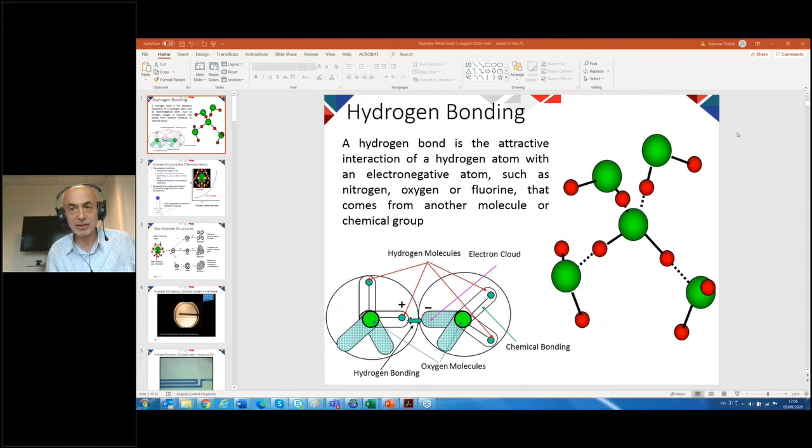Starting with hydrogen bonding. Let's see if I can have it full screen. Hydrogen bonding - water is basically a very strange compound because it can form hydrogen bonding.

Hydrogen bonding is basically when hydrogen loses an electron to oxygen. So it becomes partially positive, and the electron cloud of oxygen is partially negative. So in addition to van der Waals forces, you have hydrogen bonding. That gives water a very stable condition. That's why water can freeze and can melt or become liquid at relatively high temperature.

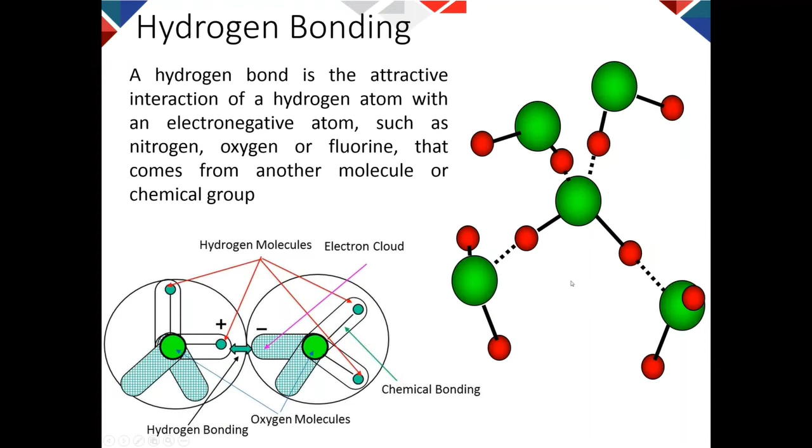So when water is in the liquid state, you have this hydrogen bonding and they form a shape like this. And if we have a gas molecule - this green sphere is the gas molecule, this red is oxygen, the white are hydrogen - when we have a gas molecule, the gas molecule gets trapped in the cages that the water molecule will form. So the gas molecule becomes trapped in the cages that water molecules form.

For the formation of hydrate, we need hydrogen bonding, so either we need water or ice. And then we need a suitable size molecule - if the sizes of the molecule are too big, they cannot fit in this cavity, and therefore they cannot form hydrate. And we need suitable temperature and pressure conditions.

Suitable temperature and pressure condition is this curve. To the right, we don't have hydrate. To the left, we have hydrate. Now the position of this curve depends on the composition of the hydrocarbon phase and composition of the water phase.

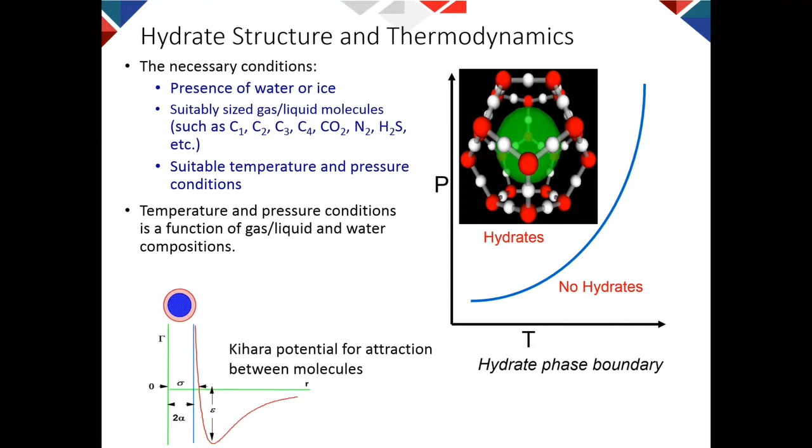There are three main structures of hydrate. The initial or common structure is a cage, and a small cage - all of these different structures have a small cage. So 2 of these small cages and 6 of the large cages will be structure 1. And then 16 of the small cages and 8 large cages form structure 2. And these cages are slightly different.

This one has 14 faces, and this one has 16 faces. And then structure H normally does not form in natural environments. So normally in the oil industry, 99 or 95% of hydrates are structure 2, and very rarely, when we have very lean gases, we can form structure 1.

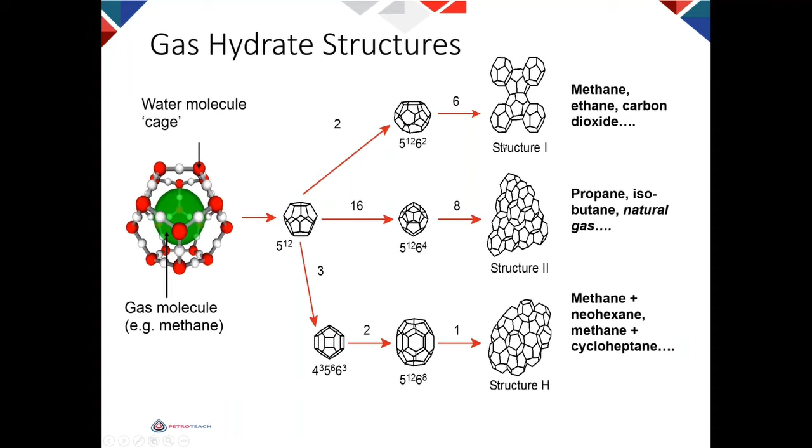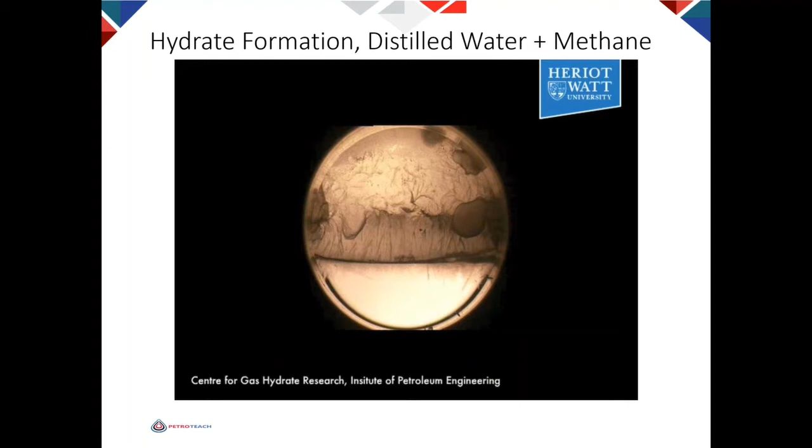Now, there's a video showing hydrate formation. This is a high pressure cell, and you can see that at the interface, most of the hydrate forms. The reason they form at the interface is because the amount of gas in the hydrate structure is a lot more than the amount of gas in the aqueous phase. Therefore, hydrate normally starts at the interface.

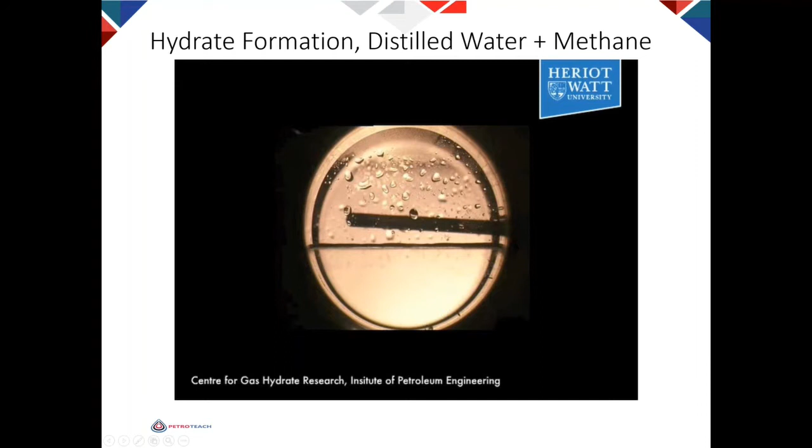But for the formation of hydrate, we don't need gas. Hydrate can form from gas dissolved in water. Here you don't see any gas molecule, but we can still form hydrate.

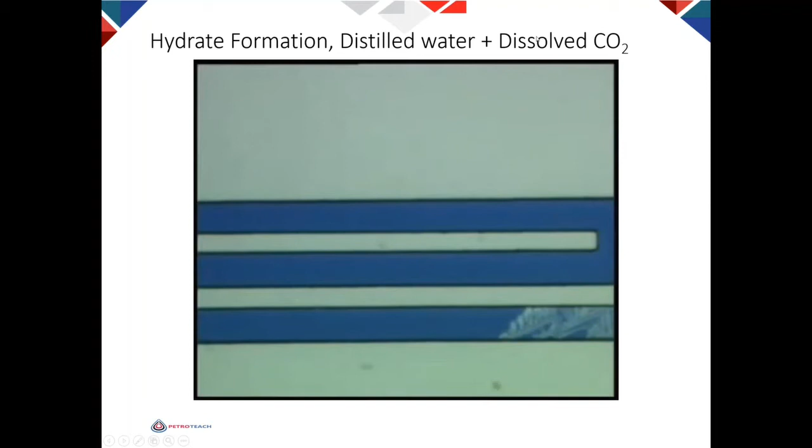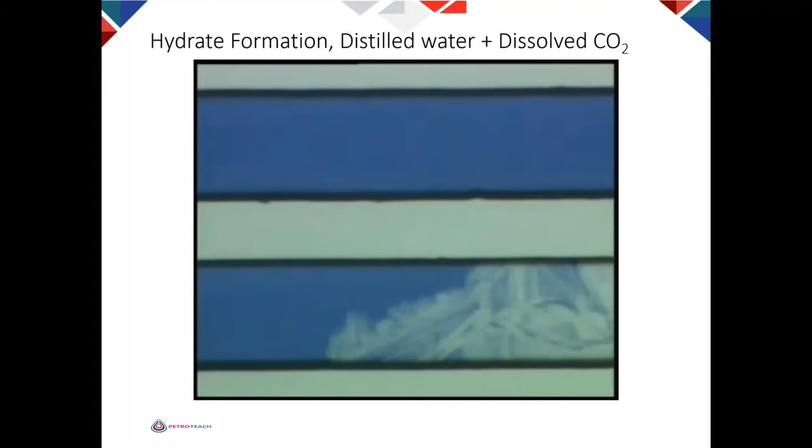And you see that CO2 has also formed hydrate with methane, but CO2 here you can see is forming a significant amount of hydrate in the aqueous phase without any gas phase. And we can control the rate of hydrate formation by playing with the pressure.

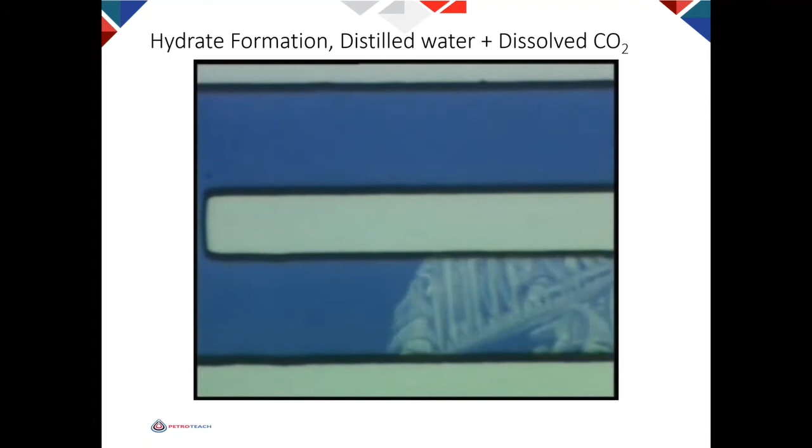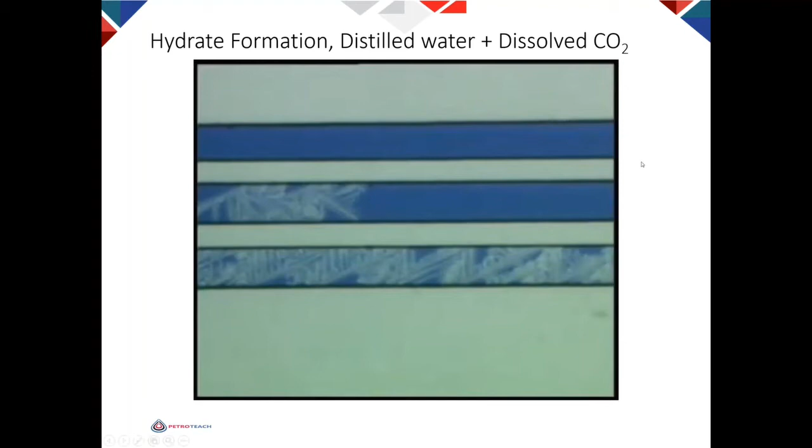And you can see that they are like a tree because they want to lose the heat. So remember, they form sort of fins to lose the heat because hydrate formation is exothermic. It produces a lot of heat, so you need to lose the heat.

Now, as I mentioned to you earlier, different pure compounds have different tendencies towards hydrate formation. In the gases we have in the industry, H2S, you see that it is a very strong hydrate former. After that, IC4. After that, propane. After that, C2. After that, CO2. And after that, methane, and then nitrogen. This is the bubble point, basically the vapor pressure line, where above the vapor pressure line we have liquid, below that we have gas. So that gives you a feeling of the tendency of different compounds to form hydrate.

So if the hydrocarbon is a mixture of these compounds, depending on the composition and concentration, you can have the hydrate phase boundary of the system somewhere in between. So for example, if it is here, then CO2 is an inhibitor, nitrogen is an inhibitor, but methane is a promoter. If it is here, then H2S is a promoter and methane is an inhibitor because they make hydrate formation difficult. So the phase boundary of the system depends on the composition of the gas.

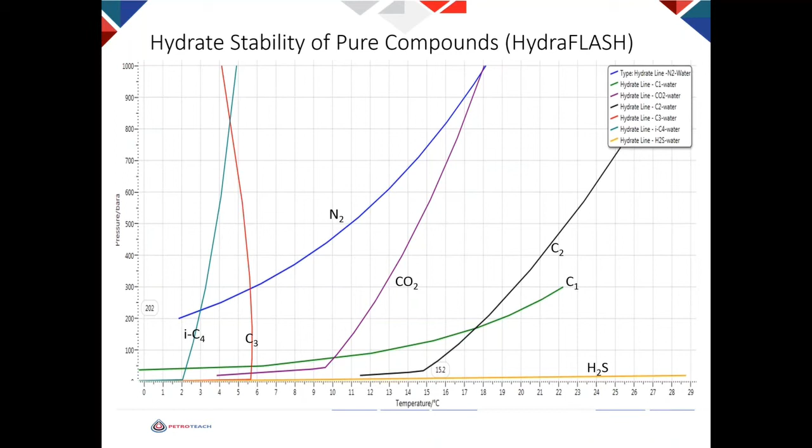And as I mentioned earlier, we have two major hydrate structures in the oil industry. Now, I just used our software and predicted the hydrate phase boundary of this mixture. I call it natural gas for future users of this mixture. So here I'm plotting the hydrate phase boundary for structure 2 and structure 1 using this gas mixture. If the operating condition is here, then only structure 2 forms. If it is here, then there is potential for both structure 1 and structure 2 forming. So that's something that can be important when we are trying to prevent hydrate formation.

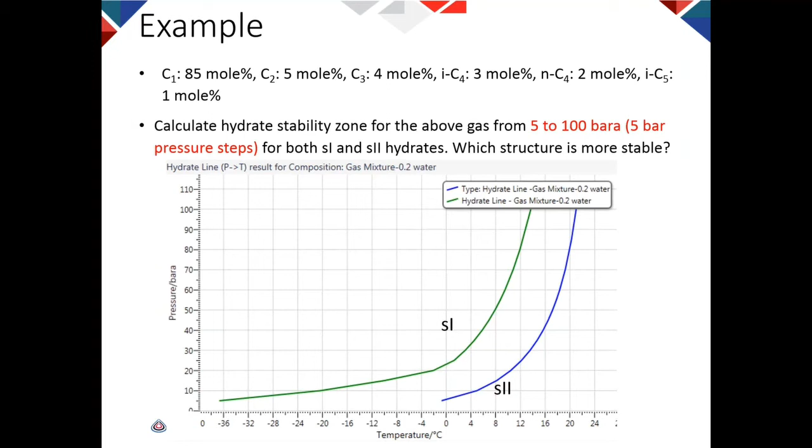So, it's better to be able to predict the position of the different structures when we are trying to prevent hydrate formation. There is another mixture. This is a very lean gas, Nuggets field in the North Sea. You see that 98% is methane with a small amount of different compounds. You see that here, structure 2 is to the left of structure 1. So the hydrate phase boundary is determined by structure 1. So here is that 5% I told you, where the system is structure 1, and 95% of the systems we see around the world are structure 2.

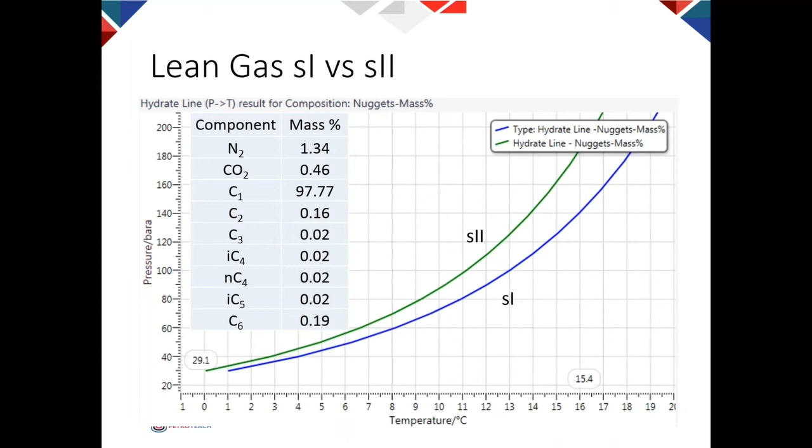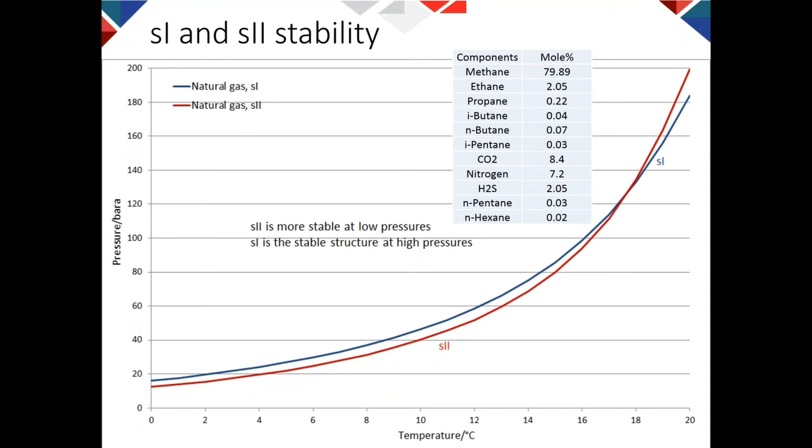This is another system, and this is from the Middle East. Another system, this is the composition. Here you see that structure 1 and structure 2 are very close to each other. At low pressure, structure 2 is stable, and at high pressure, structure 1 is stable. The reason it's more stable is because it can form first before the other structure forms.

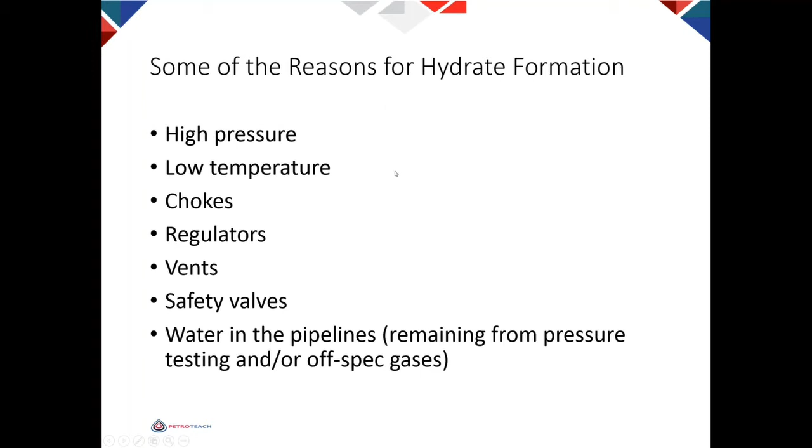Now, the condition where we can form a hydrate blockage or hydrate problem is high pressure, low temperature. When we have a choke, regulator, vent, or safety valve, the safety valve opens, and then we can form hydrate and block the safety valve itself. Water in the pipeline remaining from pressure testing or off-spec gases can all result in hydrate formation. There are many more cases, but these are examples of where you have to look for hydrate, where the risk of hydrate is maximum. So how do we prevent hydrate formation?

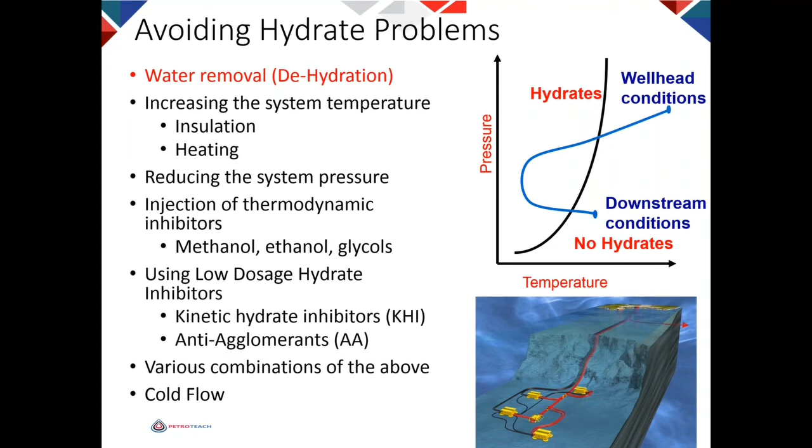Now, how to prevent the hydrate problem? One option is that you can look at hydrate as a reaction: you have water, you have gas, and you form a solid. So if you remove one of the reactants, then we don't form hydrate.

For example, if the operating condition is 10 degrees and 200 bar here, we are inside the hydrate phase boundary. But we can reduce the amount of water using a dehydration unit. For example, here we have 500 ppm water, here 200 ppm, 150. We need to reduce the water content between 100 ppm to 150 ppm. So we can reduce the amount of water and prevent hydrate formation.

But reducing the amount of water is basically expensive. You need facility, and especially offshore, it is not possible to have.

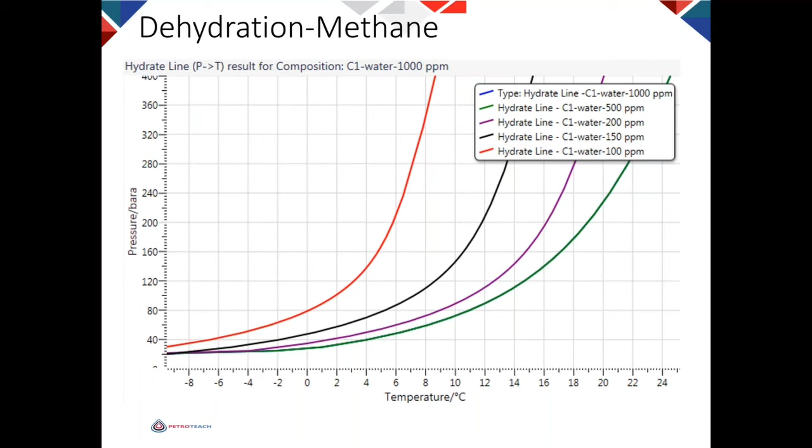Another important point these days, as we are talking about carbon capture and storage, is the behavior of CO2 and hydrate in a CO2 stream. So we have CO2, we want to transfer it to somewhere offshore to inject it into the reservoir. This is the phase behavior of CO2.

You can see that basically the triple point is minus 56.4, and the critical point is at 31 degrees temperature and 73 pressure. You can see that the system can go near the critical point, and as you know, predicting the behavior of the system near the critical point is not an easy task.

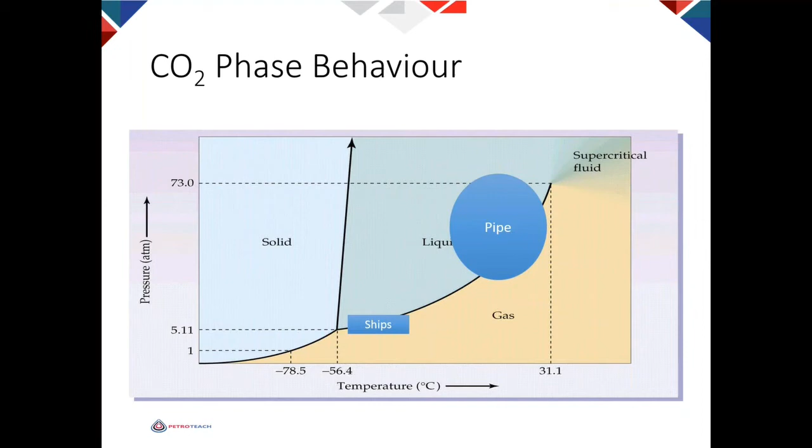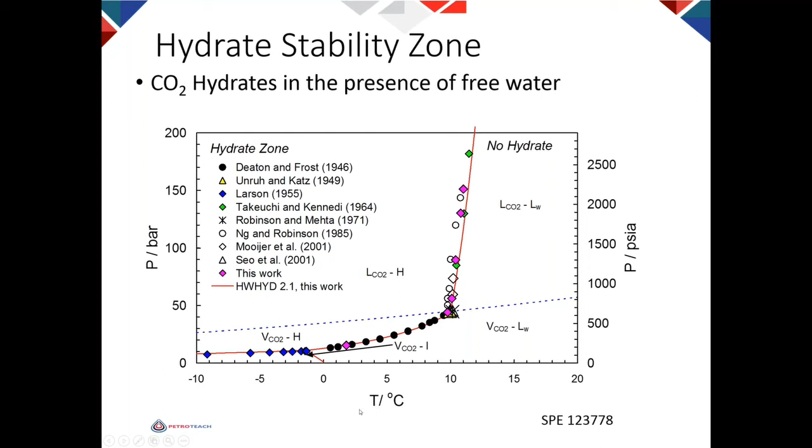So here is the hydrate phase boundary of pure CO2 when we have extra water. If we have extra water, this is the hydrate phase boundary, and this is the bubble point of CO2, the dashed line. Above the bubble point, CO2 is liquid; here, CO2 is vapor. So that's fine, that's similar to any other compound.

But if you look at the amount of water in the hydrocarbon phase versus pressure, look at ethane, for example, the blue line. This is the bubble point of ethane at this temperature, 5 degrees. You see that this is vapor ethane, this is liquid ethane, and the amount of water dissolved in liquid ethane is reduced compared to vapor.

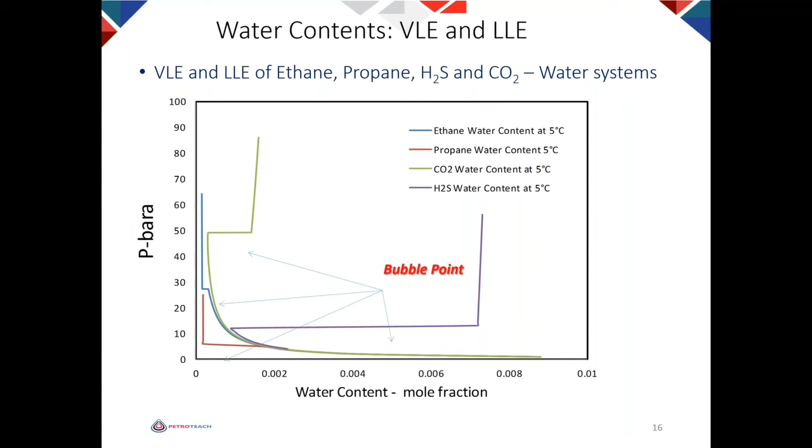And similarly for propane. But for CO2 and H2S, when they become liquid, the amount of water increases. So the liquid CO2 can dissolve more water.

So this is the amount of water in vapor and liquid CO2, at 15 degrees. You can see the bubble point of CO2 is around 50 bar. Initially, when you increase the pressure, the amount of water in equilibrium with vapor is dropping, similar to any other compound. But when you reach the bubble point, you see that with increasing pressure, the amount of water increases.

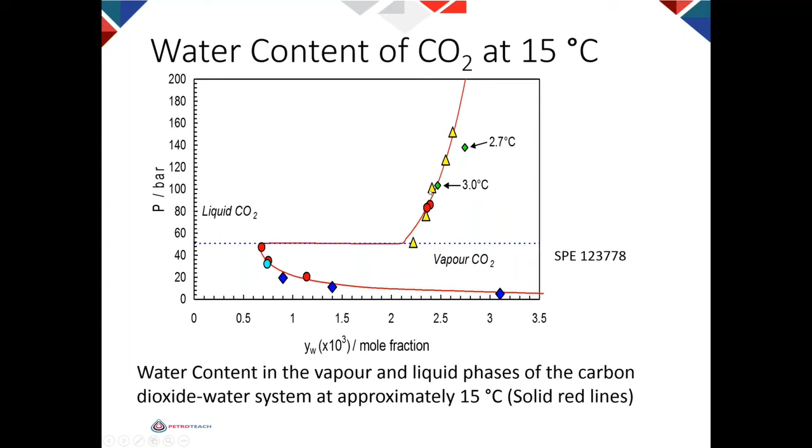So when we have limited water, it will be a problem. If we have plenty of water, this is the phase envelope of CO2, as I showed you in the two figures earlier. But when we have 250 ppm water, up to the bubble point it's similar. But when we reach the bubble point, there is a competition between hydrate formation taking the water, and liquid CO2.

And here liquid CO2 wins because it can dissolve more water. So therefore you see that there is a discontinuity in the phase behavior of CO2 hydrate. So CO2 hydrate's phase envelope will be something like this. Not a lot of software can predict that, so be careful the software you are using for liquid CO2.

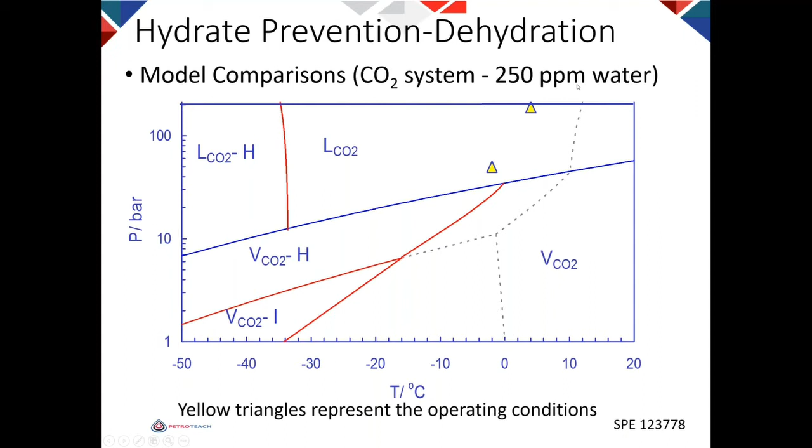This is a real case. A company approached us and said they have this triangle operating condition, and asked if there is any risk of hydrate formation. If you plot it, you see no, because this is outside the hydrate phase boundary for liquid CO2. You are above the bubble point of CO2, this blue line, and the hydrate phase boundary is here, outside it. So if we dry the CO2 to 250 ppm, then there is no risk of hydrate formation.

And then they said, oh, we have 2% hydrogen. Will that change your story? When you have two compounds, you have a phase envelope, and this is the phase envelope of CO2 plus 2% hydrogen. You see one of these points will move inside the hydrate phase boundary. Now there are two options: they have to dry further, or they have to use some inhibitor. This has been published, SPE 123778.

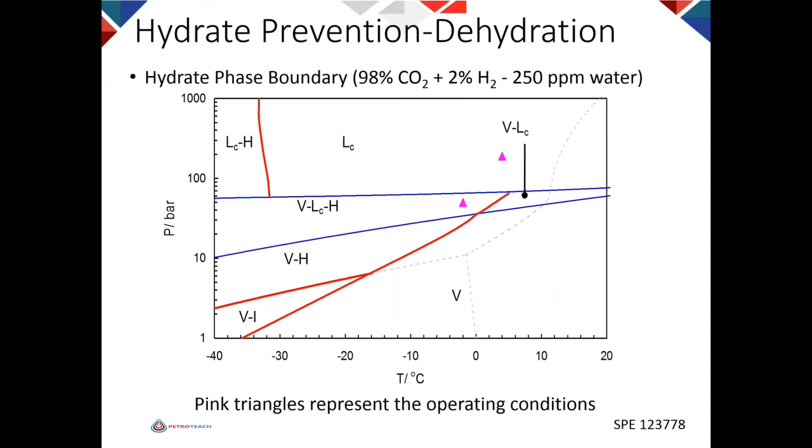So that was about dehydration. Another option is to increase the system temperature, or heating, or using...

Excuse me, Bahman, we have some comments from the audience, that the quality of the voice is not so good. They have some problems with the voice quality. Is there anything we can fix? Maybe I speak slower. I'm using a microphone. I think that's the best I can do. I can use the computer's inbuilt microphone instead. Let's try with the computer. Hello? Hello, can you hear me? Yes, maybe it's better. Yeah, I've tried with computer. Okay, microphone, sorry. No, it's fine, it's fine.

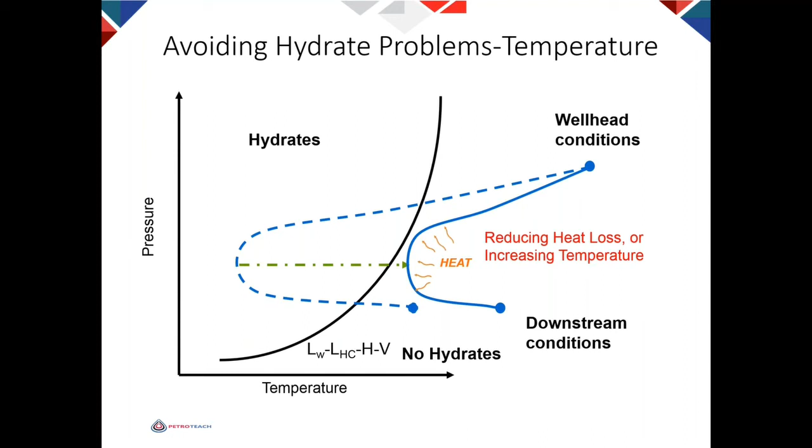So one option is to increase system temperature or use insulation, and the other is to reduce the system pressure. First I'll discuss increasing temperature. If you maintain the pipeline temperature and/or heat it, we can move outside the hydrate phase boundary. This is especially used in countries like Norway, where they don't like to use inhibitor because of environmental issues. So that's another option, but obviously it's a bit expensive.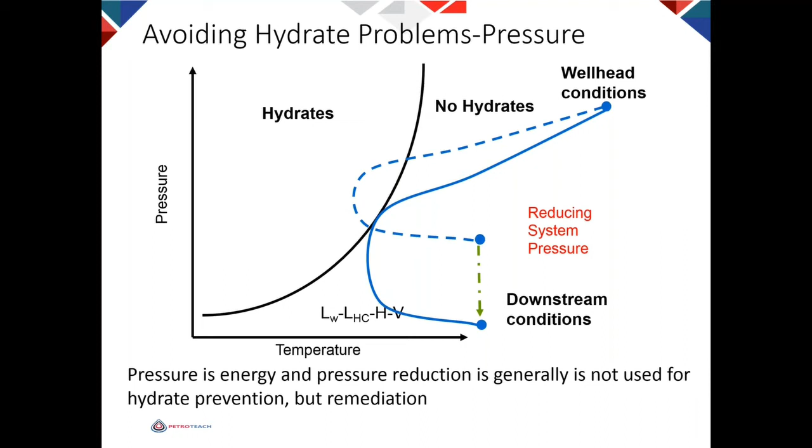The other option is to reduce the system pressure. We don't really do that because pressure is energy, and we don't want to lose energy. If it's only 1 or 2 bar to move us outside the hydrate phase boundary, that's fine, because we can recover the pressure in the compressor unit despite the extra cost. But we really don't use pressure drop for avoiding hydrate, we only use it for removing blockage. So we need to find another solution.

Injection of thermodynamic inhibitor, methanol, ethanol, glycol, and other inhibitors, they basically work on the water phase, not so much on the hydrocarbon phase. What they do is dissolve in water, so some water molecules are busy dissolving them, and we don't have enough water molecules to form hydrate. So we need to cool further. That's how they work to avoid hydrate.

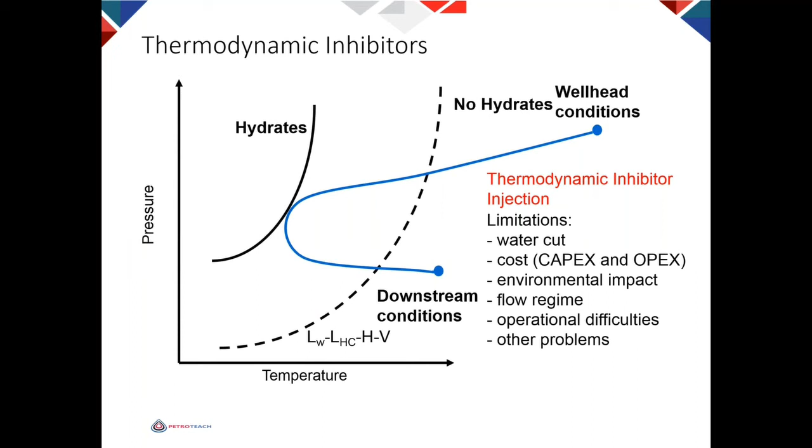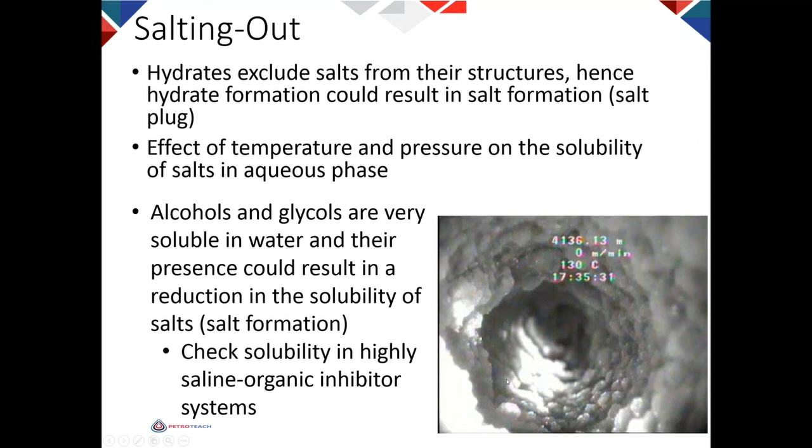The problem with thermodynamic inhibitor is that we need a lot of it in the aqueous phase, between 30 to 50 or 60%. So if we have high water cut, that's very expensive, especially offshore. When using thermodynamic inhibitor, you need to be careful about forming salt blocks, because salt is soluble in water but has a solubility limit. For example, with NaCl you can dissolve 25%, but any more and it becomes insoluble. Alcohols, however, are miscible, they can dissolve from 0 to 100% alcohol or glycol in water. So if they start competing with each other, what comes out is salt. You need to be careful when using hydrate inhibitor around salt. This is a picture from a wellbore in the southern North Sea.

Another option is to use anti-agglomerant. Anti-agglomerants don't prevent hydrate formation, but they allow hydrate to become a slurry and be transported. You can see that without chemical, with time, they become bigger and bigger, but with anti-agglomerant, no. I have a video here, if I can show it.

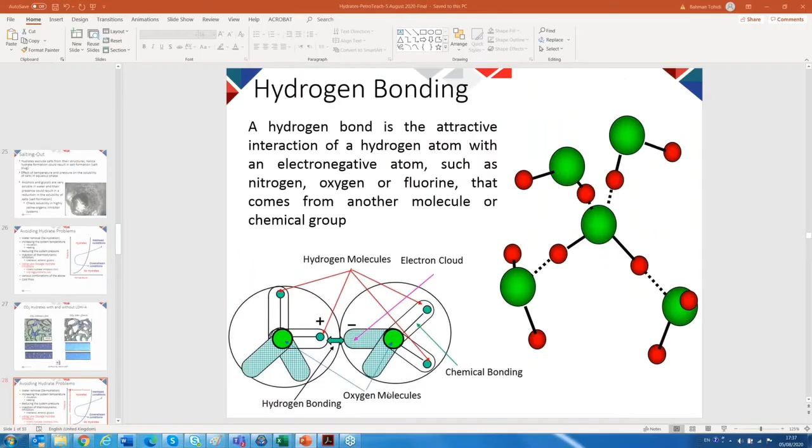This is testing anti-agglomerant. You can see that the ball is here. This is hydrate slurry. We need to make sure that the ball can move inside the slurry, and also show if hydrate is sticking to the wall. But there are other techniques as well. This is just one of the techniques for evaluating anti-agglomerant.

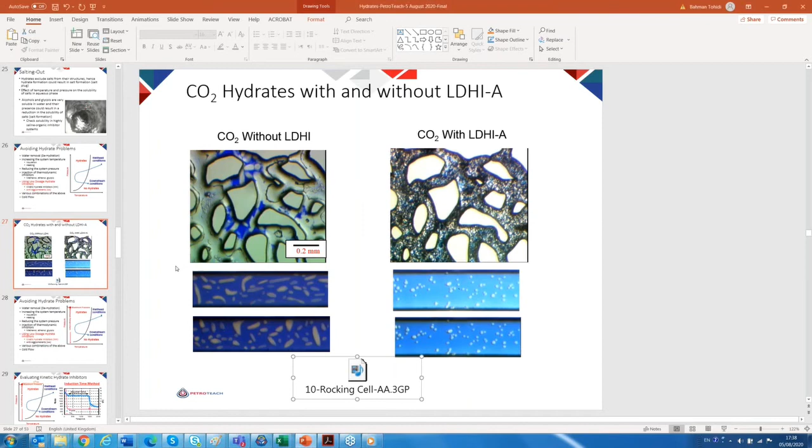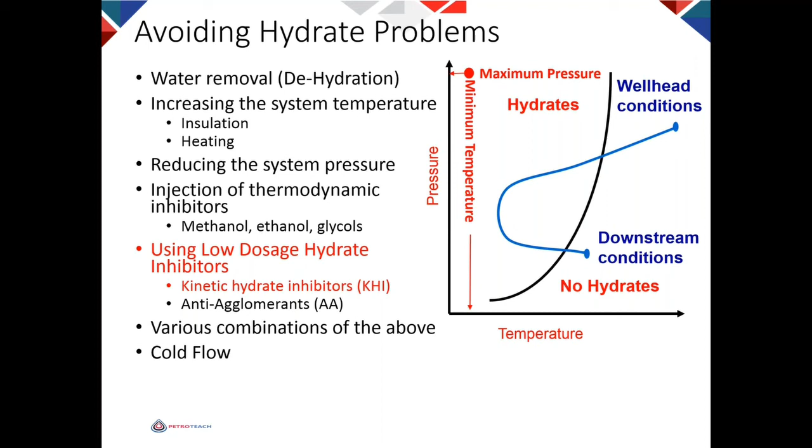One point I wanted to expand a little more on is using a kinetic hydrate inhibitor, but I'm worried about the time. Kinetic hydrate inhibitors are believed to delay hydrate formation for a certain period of time.

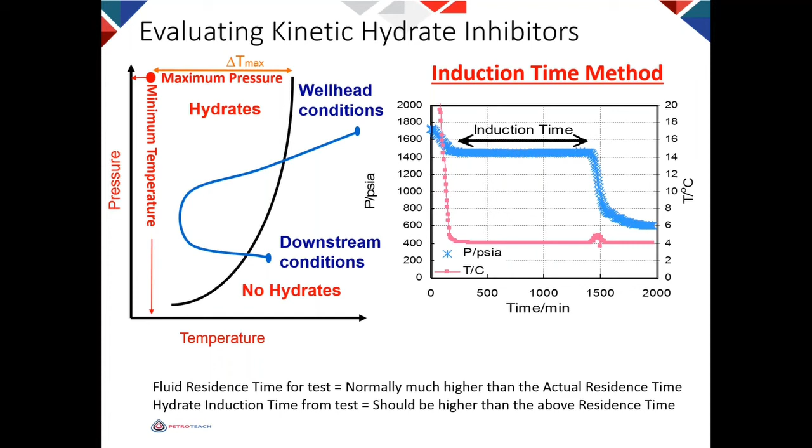But in reality, we investigated a bit more. We saw that without inhibitor, hydrate forms. You cool down the system, you need some subcooling to form hydrate, and then follow the hydrate phase boundary of methane. When you come out of the system, it melts. When we go back and cool down again, now we have nucleation, so hydrates form easily. There is subcooling required to start nucleation, but once we have nucleation, no subcooling is required.

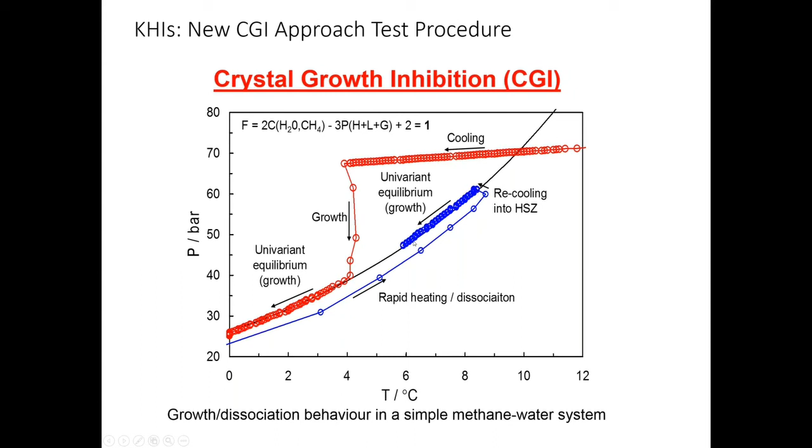Now we repeat this test with a very small amount of PVCap. You can see that we form hydrate, but the rate of hydrate formation is slower. This is every 5 minutes.

So when we want to melt hydrate, we have to go a lot outside the hydrate phase boundary. Previously we just needed 1 degree outside to dissociate hydrate. Here we need around 3-4 degrees outside the hydrate phase. So something is happening here. Once we go on the phase boundary, you'd expect this to go this way, but it goes this way. What does it mean?

This hydrate is melting. And then if you cool down, see that it's formed here, and here, up to this area, it doesn't form. So we realize that kinetic PVCap-based hydrate inhibitors have more effect than conventional kinetic hydrate inhibitors. They basically work like a thermodynamic inhibitor.

Remember, the amount of inhibitor used is very little, so it's ideal for offshore rigs where we don't have enough space for storage.

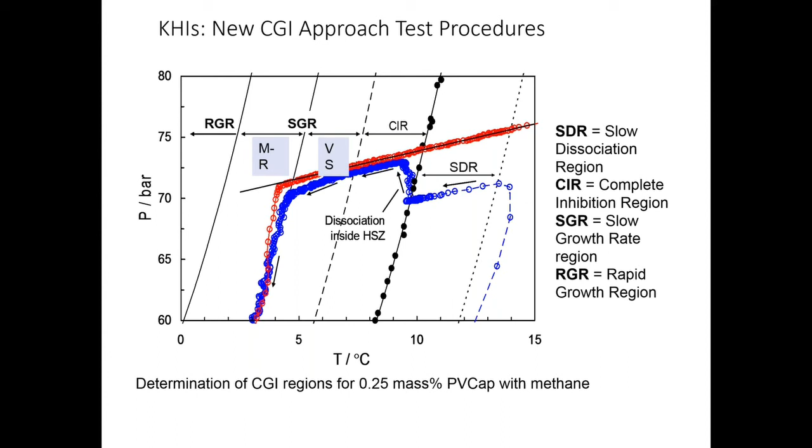We have done a lot more tests on it and found some regions: we call it a complete inhibition region, a slow growth region, and a rapid growth region. We also identified a slow dissociation region. This means that if you have KHI, you have to be very careful not to form hydrate, because if you form hydrate, you need to heat a lot more. Just coming out of the hydrate phase boundary is not enough.

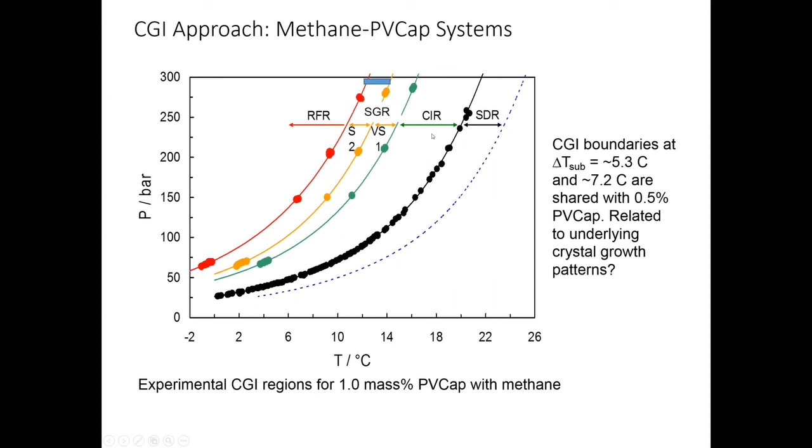So we identified these regions, this is for methane, then we tested different chemicals, and you see that different chemicals have different levels of protection. Some have no protection in structure 2, structure 1. This will enable us to design or predict which KHI will work for which system.

And that gives us a huge advantage, because in the past, KHI needed to be tested individually, but now we can choose which KHI to use. For example, if you are 6 degrees inside the hydrate phase boundary, like here, we can use all inhibitors except F. If we are, for example, 8 degrees inside the hydrate phase boundary, we can use C and B.

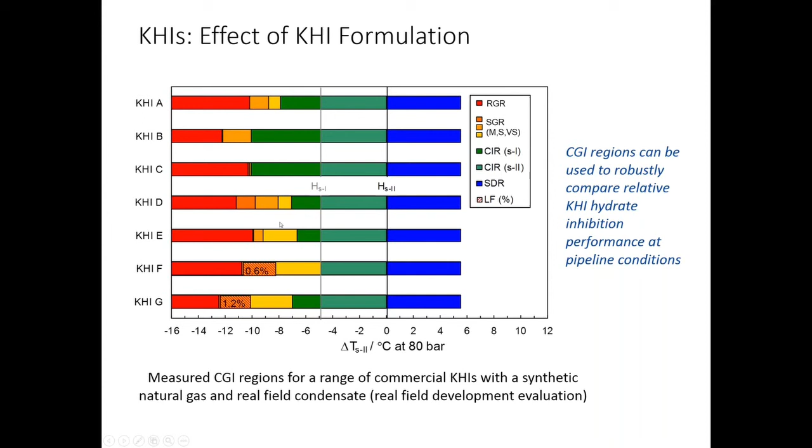So we can decide which inhibitor to go further testing, so we don't need to test all inhibitors. Now, how do we do that?

First, plot the stable structure. For this natural gas, which was 85% methane, 5% ethane and propane and the rest, structure 2 is stable, and then structure 1, PVCap - we know that PVCap prevents structure 2. So the strength of the chemical is from structure 1 onward. For this chemical, PVCap, we have 5.2 degrees inside structure 1, so total inhibition becomes 5.2 here and around 5-6 degrees, so 11 degrees.

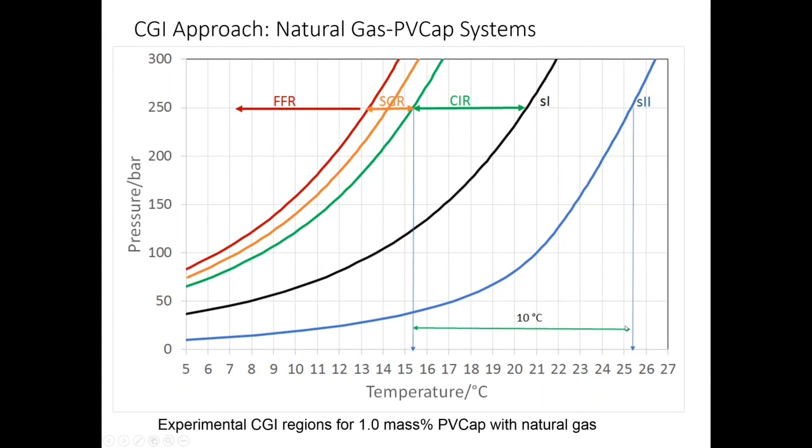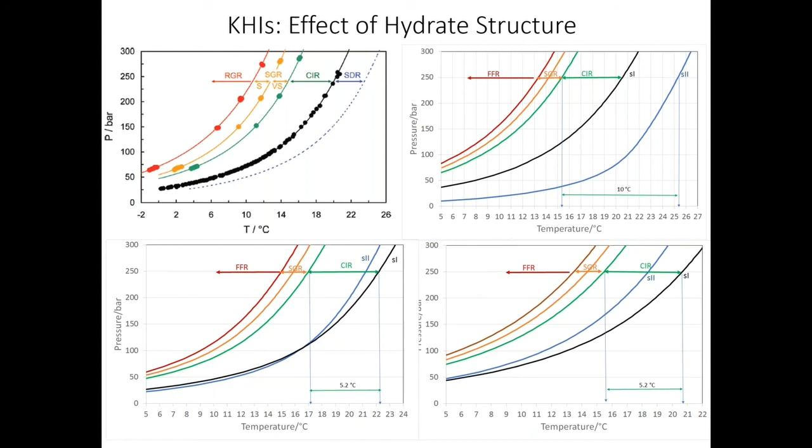So this will enable us to predict if the KHI will work in the system or not. Obviously, in the course, we can discuss this a little bit more. Now I want to divert your attention to somewhere else - I want to move to some of the new technology in preventing hydrate formation and blockage.

If you remember, I said that hydrate formation depends on the hydrocarbon phase and the water phase, aqueous phase. Now if you have these two, we can predict the hydrate phase boundary. The other point is, can we predict this? Yes, we can, by using computer simulation or pressure and temperature sensors, so we know the condition of the pipeline, and then we can adjust the amount of inhibitor we inject to move this curve back and forth. But to be able to do that, we need composition of hydrocarbon phase and composition of water phase. Composition of hydrocarbon phase within a short period of time doesn't change - basically it doesn't change.

The only thing that will change is the composition of the aqueous phase. And if we find something that can detect or determine the composition of the aqueous phase, we can plot this hydrate phase boundary and safety margin. It is very good to be able to do that, because we have uncertainty on the water cut, and then if equipment malfunctions or there's human error or changes in system condition, or if the inhibitor is off spec.

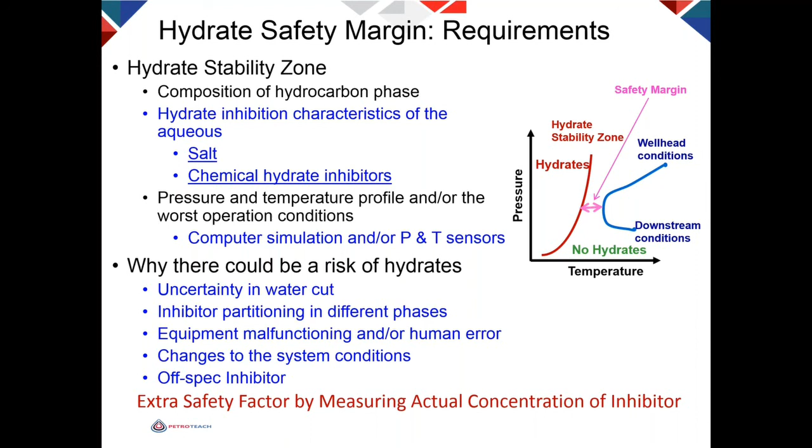So here we have a device, we call it HydraCHEK. Basically you have 100 cc of the produced water, you measure electrical conductivity and speed of sound. From that, like two equations, two unknowns, the system will determine the concentration of salt and inhibitor.

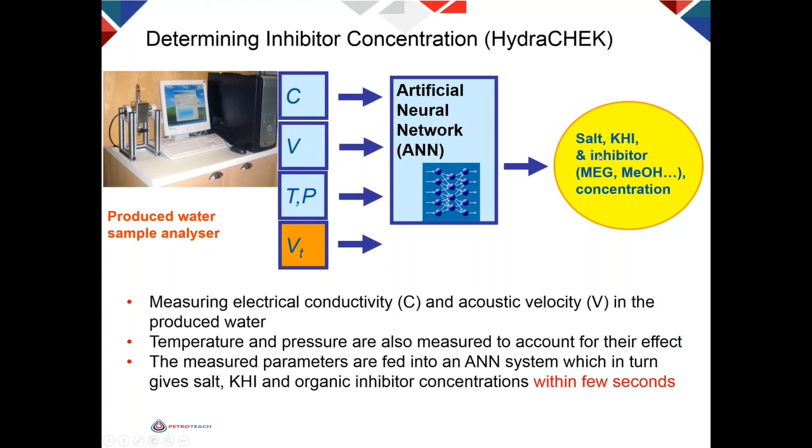And then you have hydrocarbon phase, you have water phase, and you can use a correlation or model and predict the hydrate phase boundary. If the predicted hydrate phase boundary is here, then there is a risk of hydrate, you need to increase the amount of inhibitor. If it is here, it is very close - if you can put a safety margin, then 2 to 3 degrees safety margin.

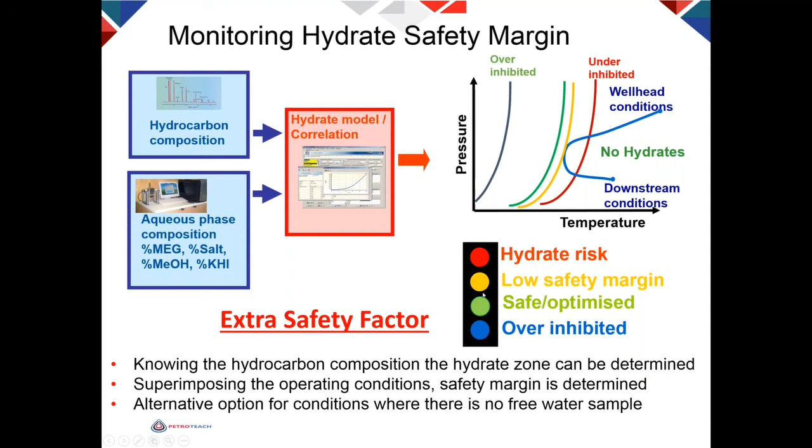And then finally here we have too much inhibitor. So this can achieve that traffic light system I mentioned.

The other novel idea or new development is using this property of different components in forming hydrate. So if hydrate forms, compounds like IC4 and propane or H2S will be trapped in the hydrate structure. Therefore, the concentration of these compounds in the gas phase is reduced. By that, we can basically get early warning that hydrate is forming in the pipeline.

And then we can also, for example, if you have a blockage, by analyzing the gas, we can say whether the blockage is being removed or not. We can also predict the position or the point of hydrate formation.

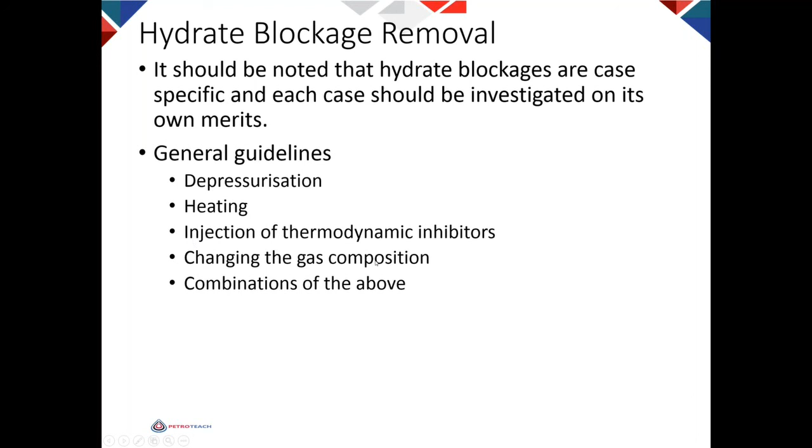The last slide - depressurization, the different options for hydrate blockage removal. The popular one is depressurization. Use heating, injection of thermodynamic inhibitor, we can change the composition of gas, or a combination of the above.